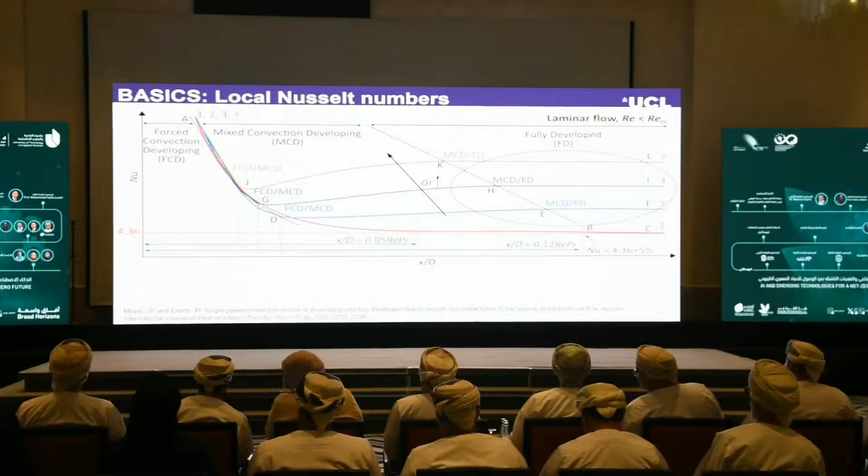However, it still increases in magnitude with increasing Grashof number. Then a small detail in this graph, but it should not be overlooked, is this boundary between the mixed convective developing region and the fully developed region. Because as we look at this graph, we see that it inclines to the left as we increase free convection effects.

This tells us something very important, and that is that the hydrodynamic and thermal entrance lengths, as we see them in our textbooks, cannot only be a function of Reynolds number, Prandtl number, and tube diameter. When dealing with mixed convective flow, which we basically find in all our heat exchanger applications, we also need to account for the Grashof number.

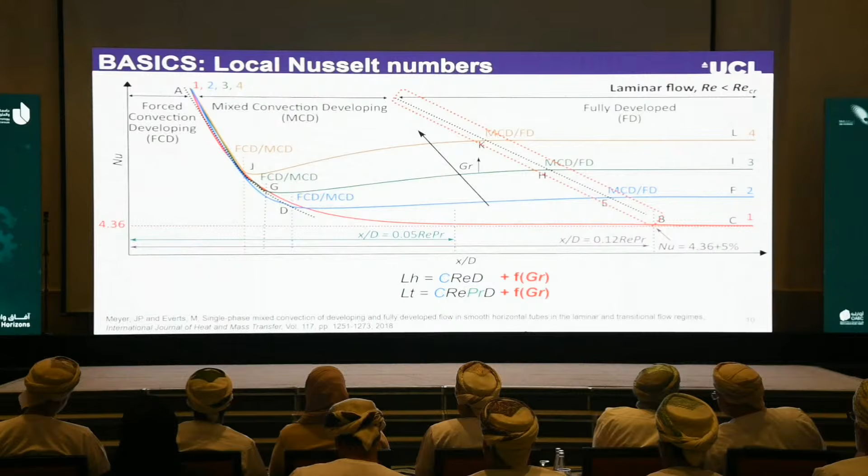It was at this point when I then started bringing in CFD investigations to complement my experimental results, and that's when I really discovered the beauty of mixed convective flow. So I started off basically where I finished, or just paused the experiments for a moment, by having a look at these boundary layer developments in more detail, because now I was able to really look into the tube and see what is happening.

As a starting point, looking at forced convective flow, it was typically as we would expect from our textbooks. The black is the hydrodynamic boundary layer, the red is the thermal boundary layer. As the flow enters a heated tube, these two boundary layers start developing and they merge in the center of the tube. So that's good, confirmed, but now what happens for mixed convective flow?

Then the two cases: the top is for a quite average mixed convective case, and the bottom graph is an order of magnitude higher mixed convective case. As we can see now, all of a sudden, what we've learned in textbooks is not really what we're dealing with in practice, and we need to better understand what's really happening inside our heat exchangers.

So if we start with the hydrodynamic boundary layer, which is the black lines in this case, we see that for both forced convection and mixed convection, it merges in the center of the tube. However, when we increase the mixed convective conditions, this point occurs earlier inside the tube. But then the big difference is that this point does not stay constant. It actually decreases, increases slightly, and then only becomes constant and thus fully developed much, much later along the length.

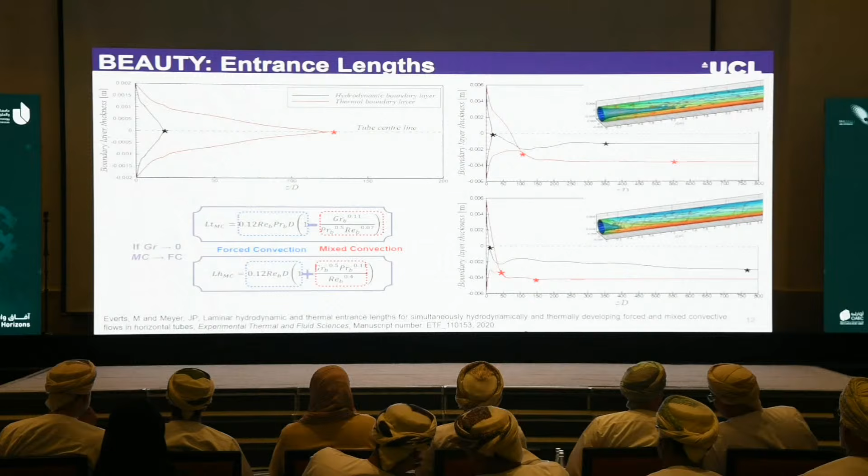The beauty of these correlations is that when the Grashof number tends to 0, they automatically tend to the forced convective correlations. So irrespective of whether you're dealing with forced convective or mixed convective behavior, these correlations can be used.

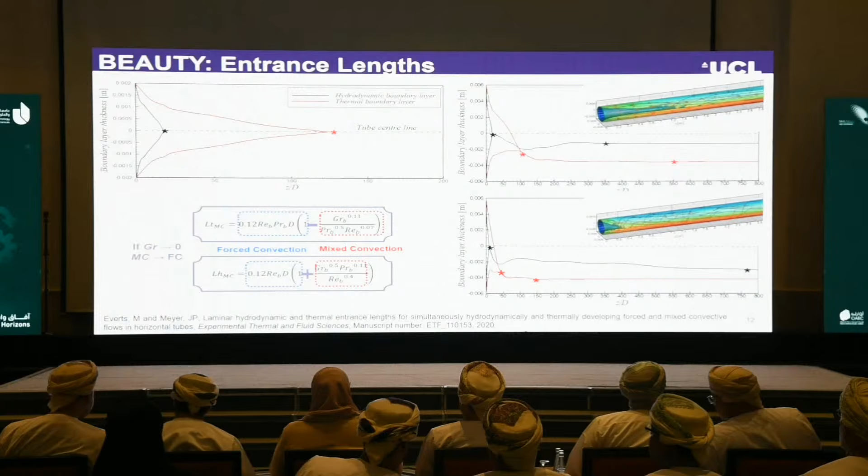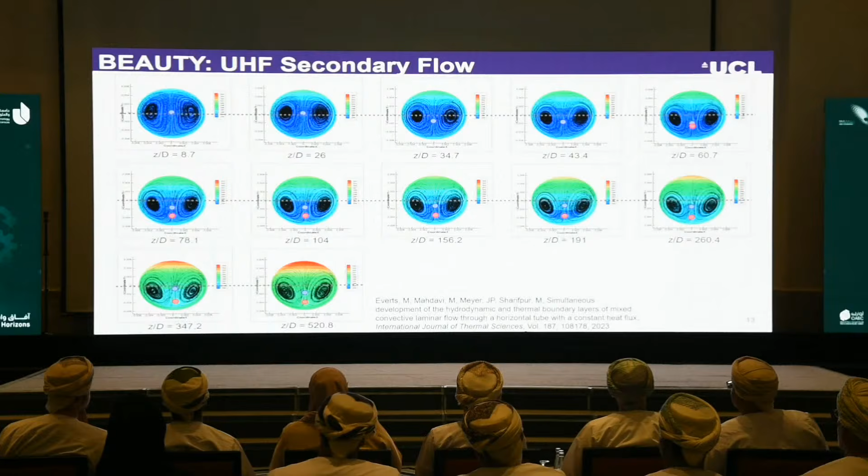I then went a little deeper and looked at the streamlines and thermal behavior inside the tubes. The dotted lines represent the center line of the tube for reference. We can see that the vortices, our secondary fluid motion, as they developed and became stronger, moved downwards and towards the sides of the tube, which explains why those merging points developed below the center line of our heat exchangers.

As we can see here, it starts very nice in the center of the tube, then moves downwards, and then slightly upwards before becoming approximately constant. Likewise, with the thermal boundary layer, this merging point, indicated by the red dots, first moves downwards and then becomes approximately constant.

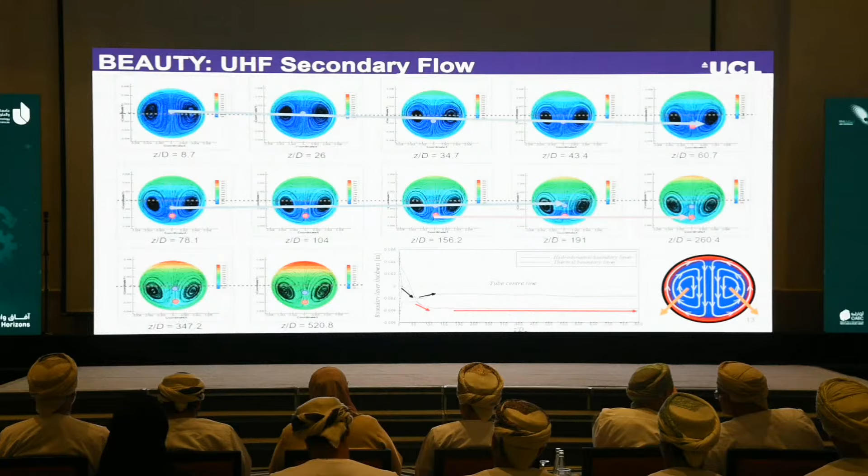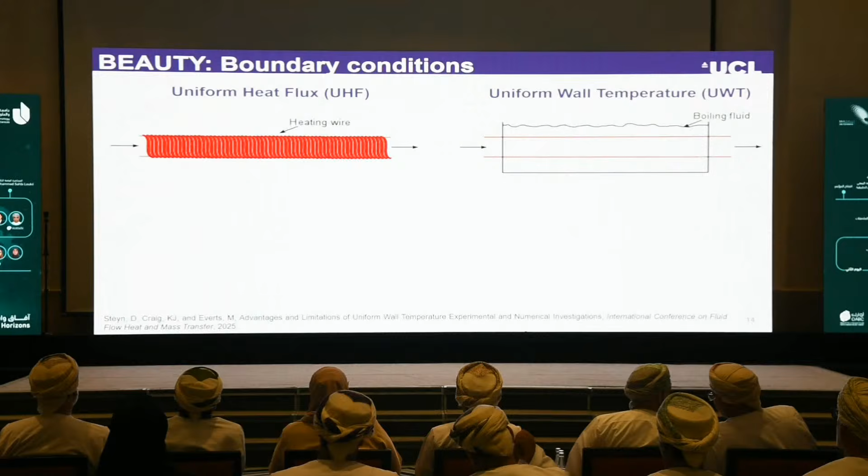The researcher in me was then curious: if this is happening with the constant heat flux boundary condition, what happens if we now change the boundary condition to a uniform wall temperature? Again, these are the two cases we deal with in our heat transfer textbooks.

As the name suggests, when dealing with a uniform heat flux boundary condition, the surface-fluid temperature difference becomes constant once the flow is fully developed. Because this is constant, we can expect constant Grashof numbers and therefore constant mixed convective behavior, as we've seen in the results up to now.

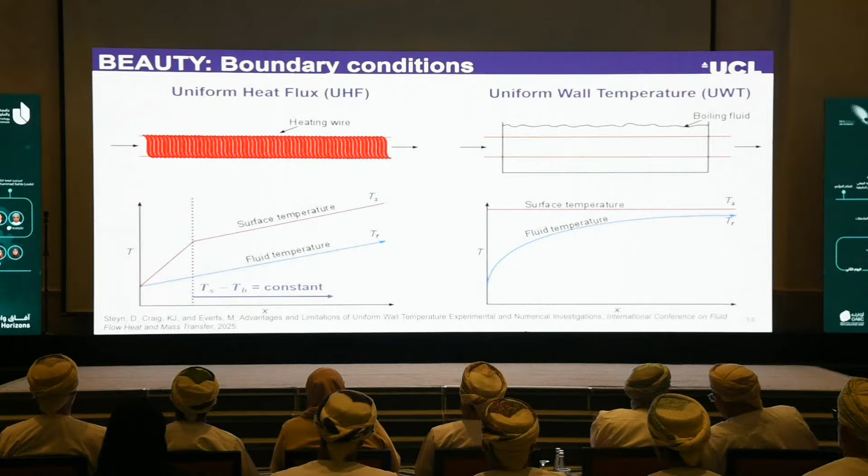However, when we change the boundary condition to a uniform wall temperature boundary condition—which is actually typically the boundary condition we deal with in most phase change heat exchangers, because once it involves boiling and condensation, we're dealing with this kind of temperature profile.

We can see that this surface-fluid temperature difference is almost never constant. And because that is not constant, our Grashof number can't be constant, which tells us that our mixed convective behavior is continuously changing inside the heat exchanger, and we need to know how we can benefit from it to improve our heat exchanger performance.

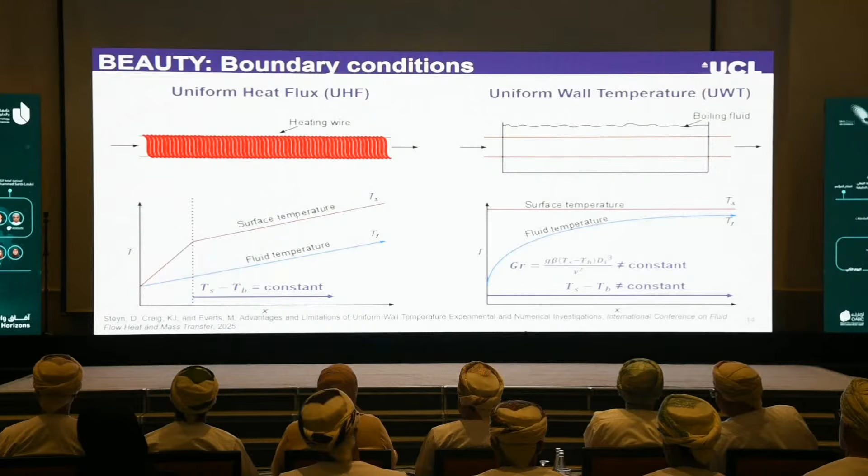Similar to before, I've had a look at the streamlines and temperature profiles inside the tubes, and it looks more or less the same. However, you'll see that now the streamlines are much more symmetrical, which is good, but it also tells us that mixed convective behavior is quite suppressed in this case.

Again, dotted lines are just for reference showing where the center line is. We can see that this merging point, although it developed quite below the center line due to mixed convective effects, as the flow further developed, it moved back very much to the center line.

You might at this point think, okay, but what's the big deal? Because we still have temperature gradients, so we still have this convective behavior going on. But it should be noted that this is the local temperature range—it basically just looks at the local temperature range at this specific cross-section.

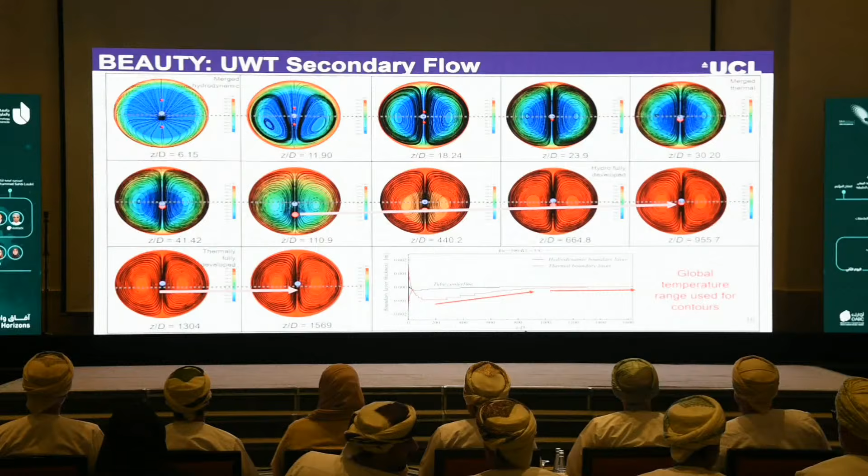If we plot this in terms of global temperature ranges, we see that towards the end of the heat exchanger, there's a very negligible temperature gradient, and therefore we can no longer benefit from any of these mixed convective effects.

It's very important when designing a heat exchanger to understand with which boundary condition you're mainly dealing, because that can tell you whether you should aim for a longer heat exchanger or go for a shorter one. Near the inlet of the tube it behaves quite similarly, but towards the exit the differences become significant: constant for a uniform heat flux boundary condition, whereas for uniform wall temperature we basically lose all of this mixed convective power.

What's happening in terms of the boundary layers directly impacts our heat transfer coefficients, which we're fully dependent on. Irrespective of which boundary condition we're operating with, near the inlet the trends are quite similar: it decreases from a maximum as the flow develops, then increases as mixed convective behavior kicks in and becomes dominant. After a certain point, we can maintain these mixed convective effects with uniform heat flux, but we completely lose this power with uniform wall temperature. The longer our heat exchanger, the smaller the temperature difference becomes.

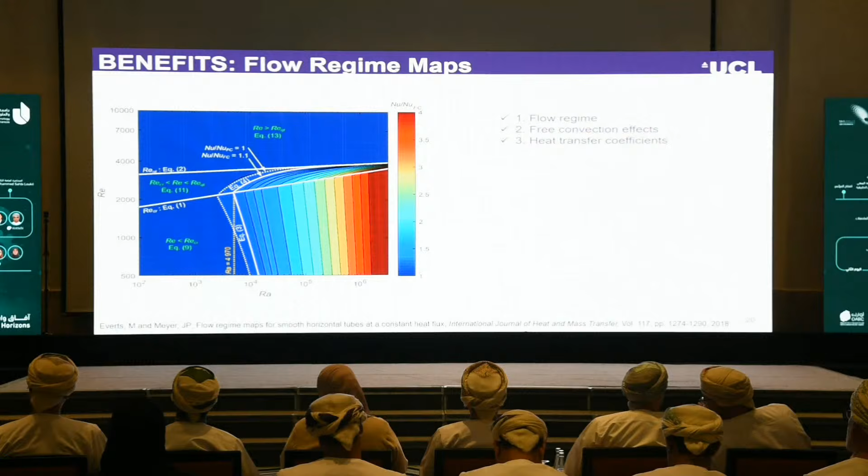How it works is we have Reynolds number, which categorizes our flow regimes, on the y-axis. On the x-axis we have Rayleigh number, the Grashof number multiplied with the Prandtl number, which accounts for different heat transfer fluids as well as mixed convection effects. In the blue areas, that's where we're dealing with forced convective flow, which is general information readily available in textbooks, whereas the colorful regions focus on the mixed convective behavior and the enhancement we can get through this.

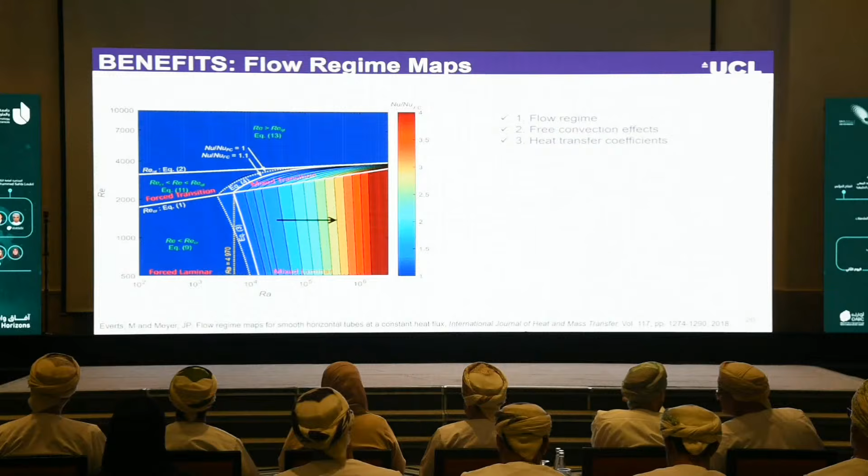So at the bottom we have forced laminar, mixed laminar; in the middle, forced transition, mixed transition; and at the top, the forced turbulent flow regime.

So say, for example, we have a heat exchanger with a Reynolds number of approximately 1,000 and a Rayleigh number of 10 to the 5. We can quickly locate this point on our graph, and we see it's more or less where the color changes to cyan. Looking at the color bar, that's a Nusselt number ratio of approximately 2. Our forced convective reference is 4.36; substituting it in, we have a Nusselt number of approximately 8.7. So without any complicated correlations prone to typing or calculation errors, within a few seconds we knew we had to account for mixed convective flow, knew it was laminar flow, and had an estimation of the heat transfer coefficients inside our heat exchanger.

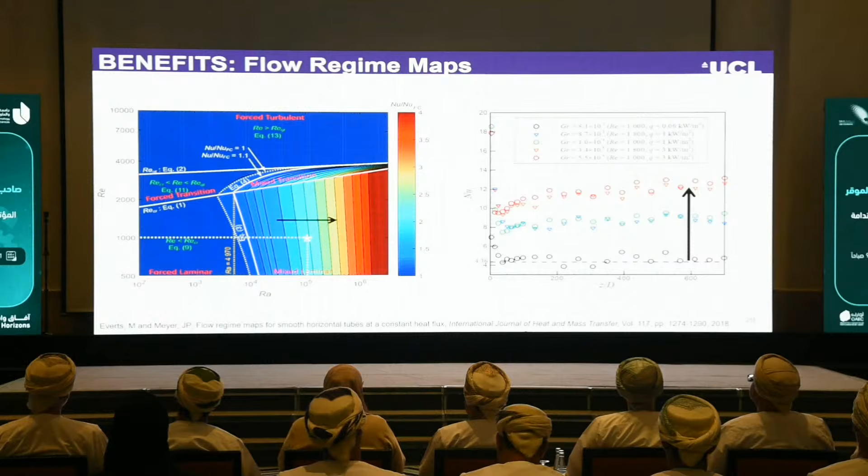I then also developed, for those focused on accuracy, correlations that can be used in each of these flow regimes: for the laminar flow regime, transitional flow regime, turbulent flow regime, and then a summary correlation that summarizes everything for us.

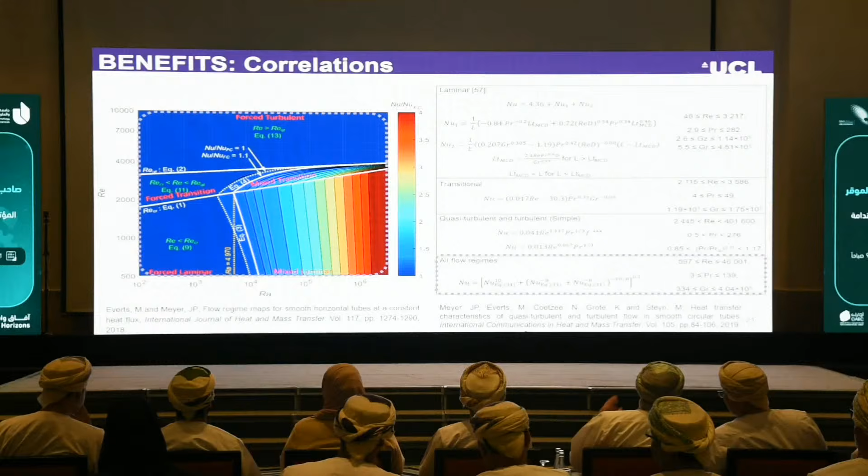Looking at the thermohydraulic behavior is very important because we can't only look narrow-mindedly at heat transfer coefficients, we also need to look at the pumping power. That's what we do within our friction factors through simultaneous heat transfer and pressure drop experiments. As we can see here, with mixed convective flow we were able to give a bigger enhancement in heat transfer than the price we had to pay in terms of pressure drop, which led to higher j/f factors and thus improved thermal hydraulic behavior.

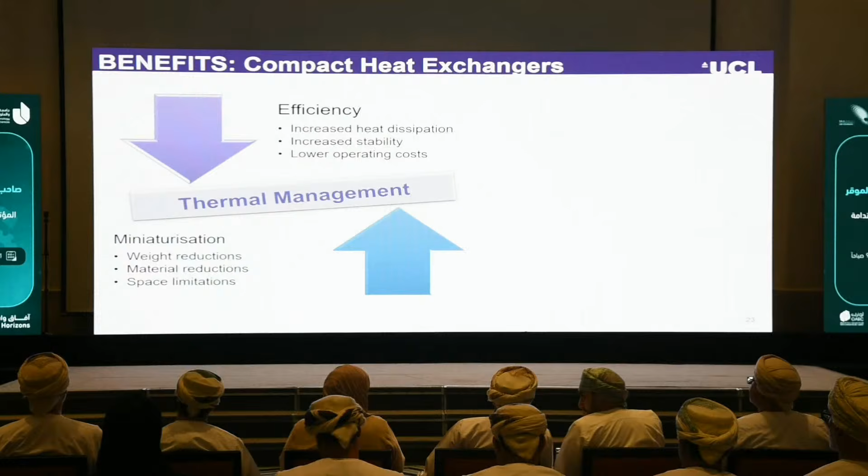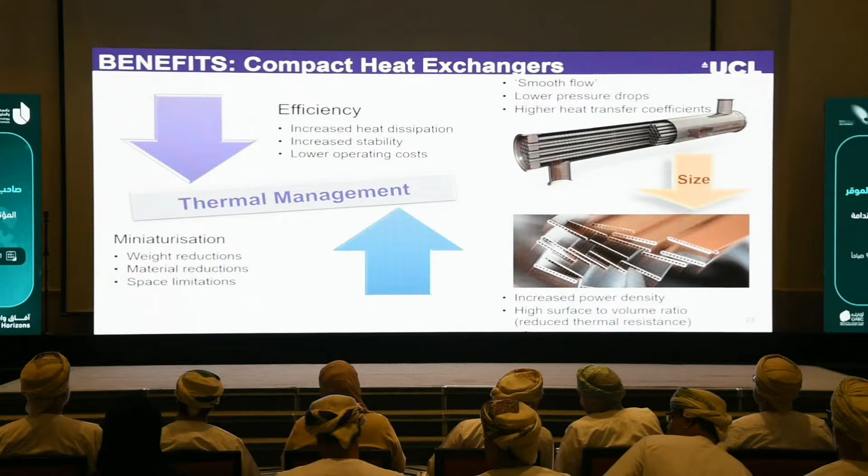When dealing with thermal management, we have this tug of war going on all the time, where on one side we're pulled towards miniaturization, and on the other side we continuously need to increase our performance. For that reason, we often go towards smaller channels to increase the power density and surface to volume ratio. I therefore started looking at non-circular channels to understand if we can compress this mixed convective behavior in a more compact way and still benefit from it.

So to conclude, mixed convective flow, although it's kind of underrated in our textbooks, it's very important in our everyday heat exchanger applications. It enhances our heat transfer, but it also affects our hydrodynamic and thermal entrance lengths, and that's why flow regime maps are really helpful to predict its significance. We can increase this heat transfer by increasing the diameter, heat flux, temperature difference, as well as the aspect ratio, and we can still benefit from this in compact heat exchangers, and enhance it further through surface modifications.

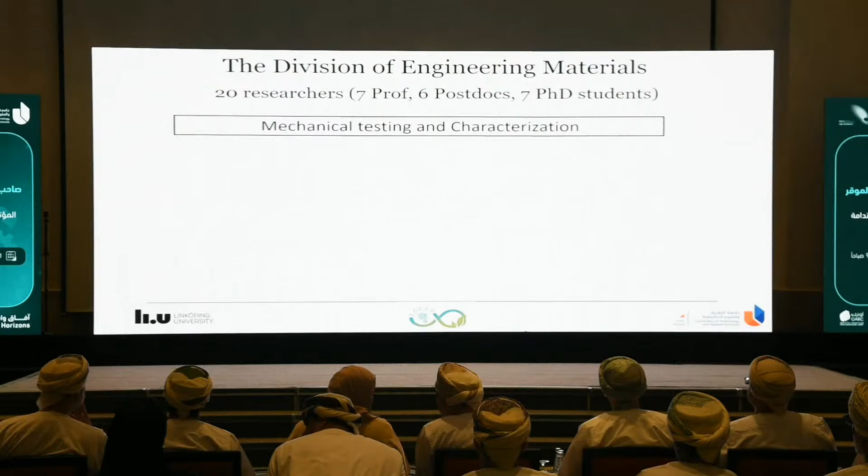We have a lab with many equipments that help a lot to investigate the microstructure and link them to the properties of the material.

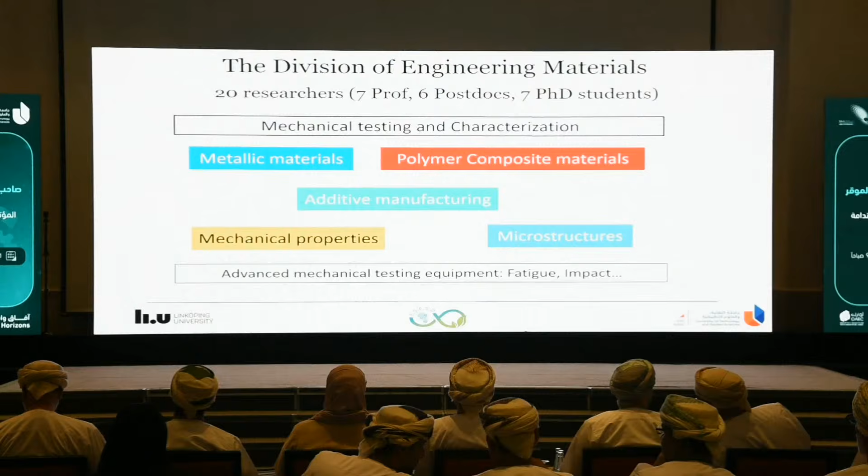Today, I picked 2 topics that I will present to you. The first one is about marine, and how we can make the marine sector, like boats, more sustainable. The second topic will be about aerospace, and there I will focus more on hydrogen as a net zero application.

But before that, since I will talk about sustainable materials, and more specifically composite materials, and how we can use composite materials to make these two sectors more sustainable, I will just give a short and brief introduction to composites. So what is this material?

Usually composite is a combination of two different materials. The first one is fibers, and the second one is a matrix. The fibers usually are very strong, very stiff, so they have very good properties. But to glue the fibers together, we need to add the matrix. The matrix is like a glue that we use to bind all the fibers together and make a component or a product.

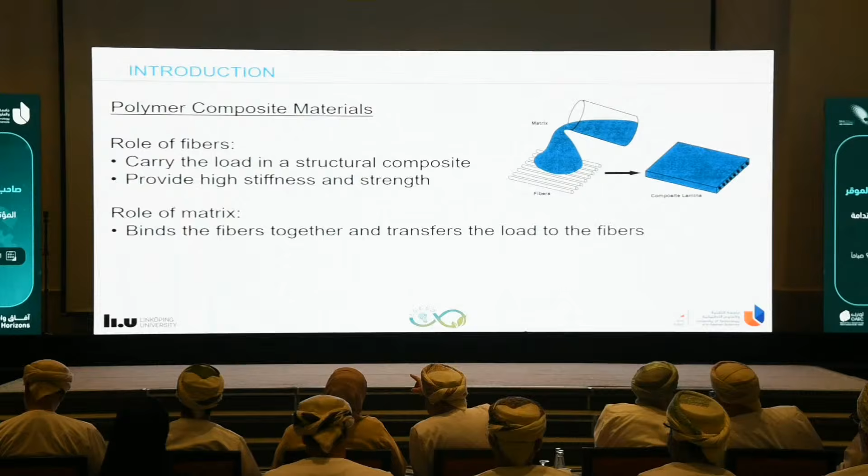Composite material is usually used in different sectors, like aerospace. The Boeing 787 contains 50% composite material in its total structure. It is used a lot in wind energy too, so wind turbine blades are made of composite material, almost 80%, as well as sport cars and many other applications.

But the question is why we use composite material. Composite material is very light, but it has very strong properties. We talk a lot about sustainability, and we want to use more sustainable materials. For example, if you have a heavy structure moving, like a car or an airplane, one option to make it more sustainable is to make it lighter. If we make an airplane lighter, it means it will consume less fuel, and the CO2 emission will be less.

So composite material is the best material to use to make a structure very light, whether it's a car or an airplane. Every structure which is moving, to consume less fuel, we can replace heavy materials like steel with composite materials. These materials are also corrosion resistant, so we don't have any problem with corrosion. We can also tailor the properties of these materials, putting more fibers in the direction where we have a load to get the structure stronger in very specific directions.

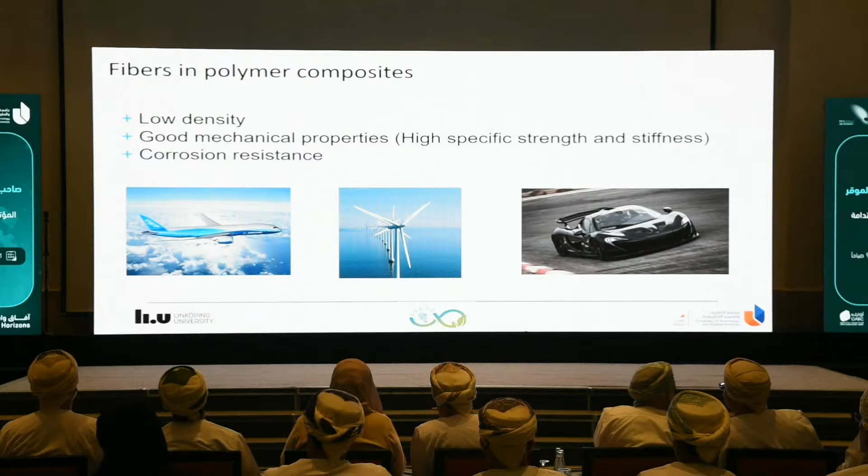This boat is made from two types of fibers. We call the black one carbon fiber, and the white one glass fiber. The problem with those fibers is they are not sustainable. To make them, they go through a lot of chemical reactions in the lab, high temperature, high pressure, and so on. So we wanted to use a more sustainable material.

One option is to use what we call natural fibers, just taken from the forest, from the trees. The question is, can we use these fibers and make the boat more sustainable? This is what the company wants. They want to show that their boat is 100% electric, but also made from sustainable material.

Those fibers have problems. They absorb water. So if you make a boat directly from those fibers, they will just degrade and absorb water. We wanted to help this company use more sustainable materials in a smart way and reduce their sensitivity to water and humidity. One option is to coat these fibers with graphene, make some treatment and check how the sensitivity to water and humidity will change.

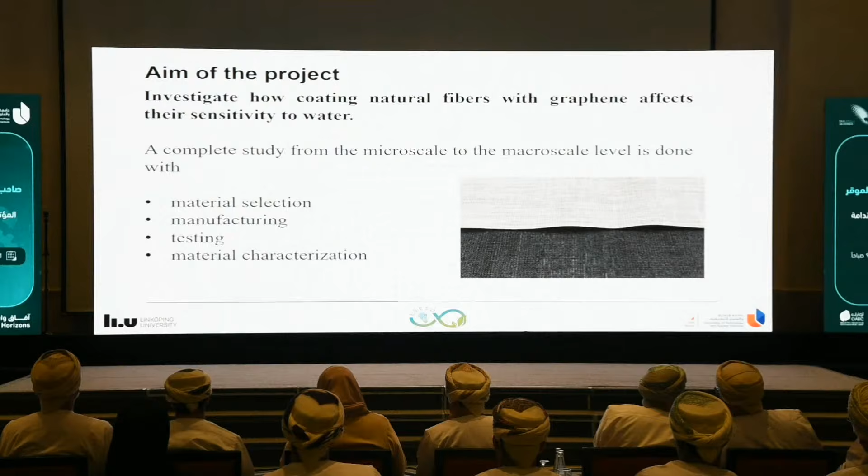What you see on top in the picture is the fabric or fibers that we use. We use a fiber called flax fiber. What you see on the bottom is the fibers after coating them with graphene. For the coating, we had a partner in the project, a company in Sweden.

They are experts in coating fibers for thermal conductivity, but it was their first project working with natural fibers - they used to work with glass fiber for thermal conductivity. What they do is prepare a solution with graphene, like an ink, put the fibers in it, then dry it, and it becomes coated. They did a great job, the coating was perfect.

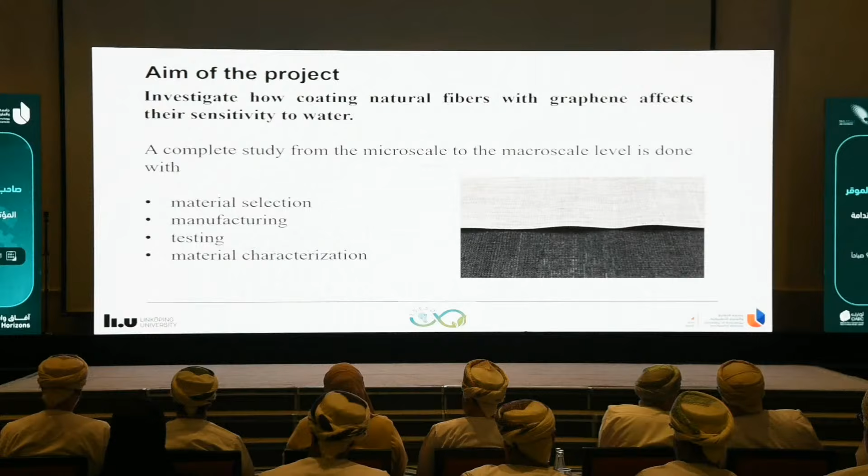We had three suggestions in the project. First, we made a part with flax fiber, natural fibers, and coated. The second option, we only coated the top and bottom layers, because we thought this could protect the inner layers from water and humidity, so water would not go inside the boat. In the third option, we coated the whole structure.

So all the material we used was coated. We used a flax fiber, and a bioresin as the glue. We used a method called vacuum infusion, which I'll show you later how it works. We did all needed investigations at microscale level, at the lab, and also for the demonstrator.

We applied many mechanical tests needed to approve that this material can be used for the marine industry. We also did water absorption testing - we put the structure we built in water to check how much water it would absorb if we coat the fibers.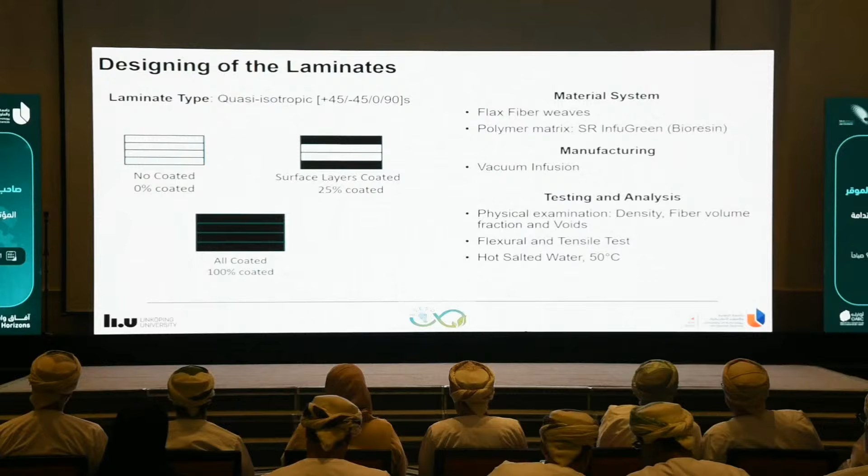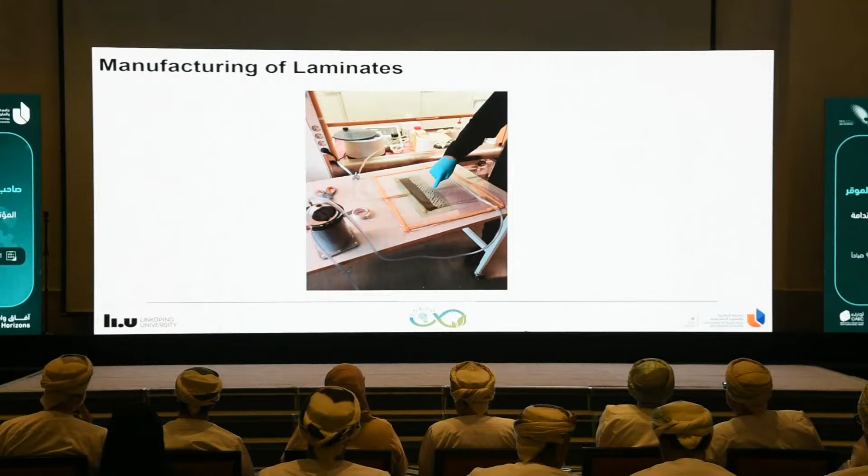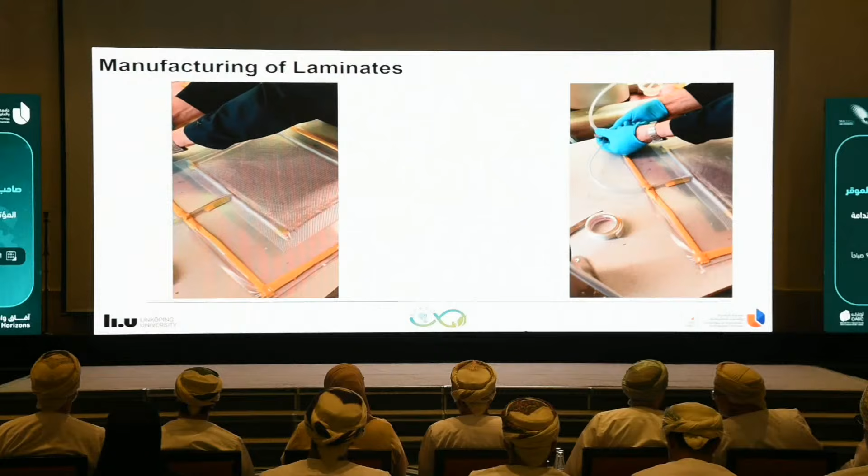This is the vacuum infusion method we used, how it works. We have the resin going inside the layers that we put. Let me show you this video - first you have the layers, the flax fibers, the natural layers, and the resin going inside, with a horizontal tube that has some holes.

So the resin propagates inside the whole fabric. This is a simple flat geometry that we made, but we also manufactured a component using this method. The resin covered the whole area along the length and the thickness.

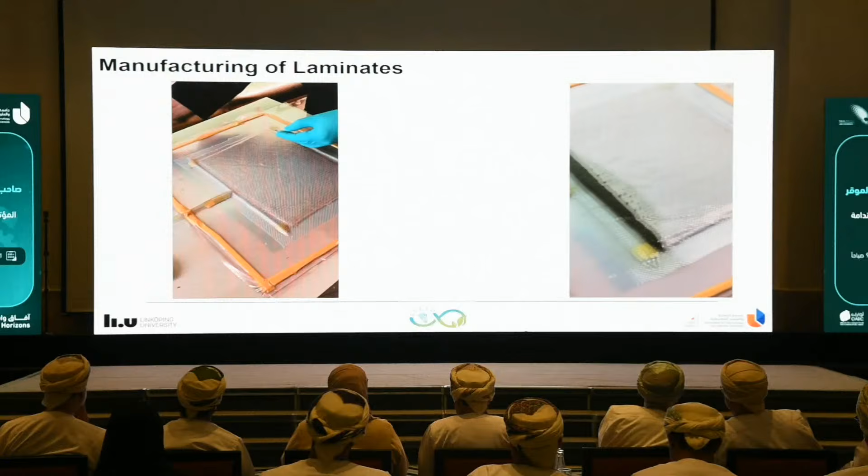So then we had the question, why didn't it work? After discussing with all the partners in the project, we noticed that the company who did the coating applied the same process they use to coat fibers for thermal conductivity. This was their first project with natural fibers to improve mechanical properties and resistivity to water.

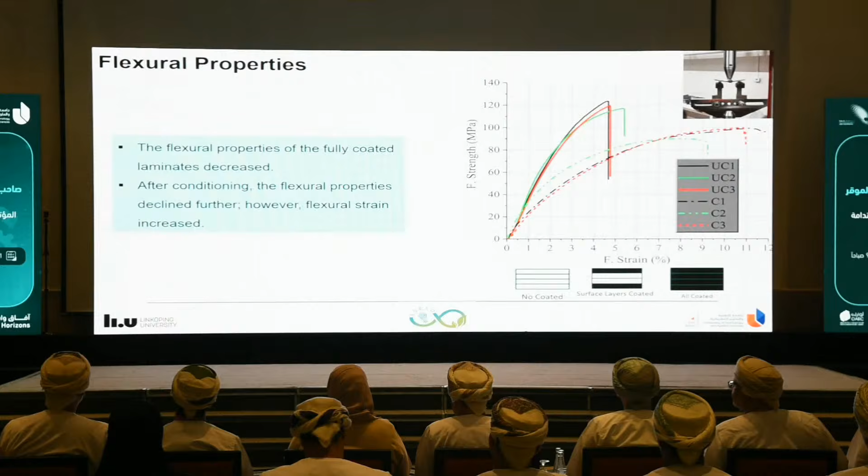That was actually helpful because that was the problem. When they did the coating the first time, they already had a certain concentration they use for thermal conductivity, not for natural fibers. So the results were different.

We coated the material with higher than 1.5%, but it didn't show good results. So there is an optimum value, and if you increase the concentration a little more than that optimum, the properties go down again. For that reason, we decided to keep 1.5%.

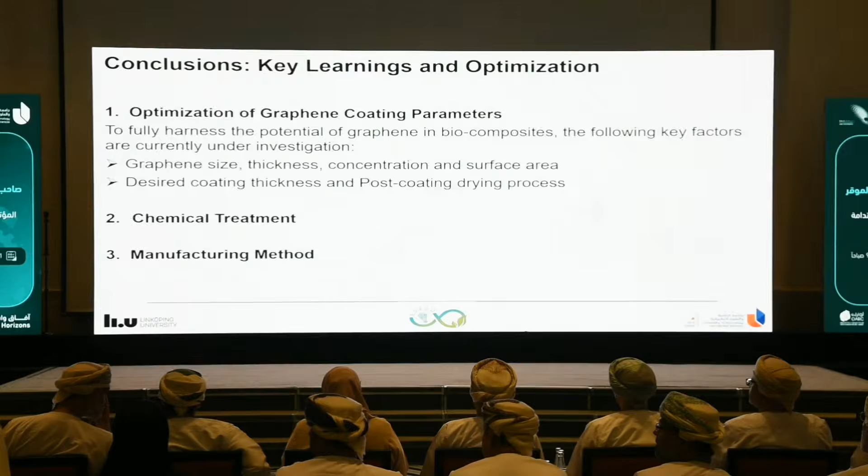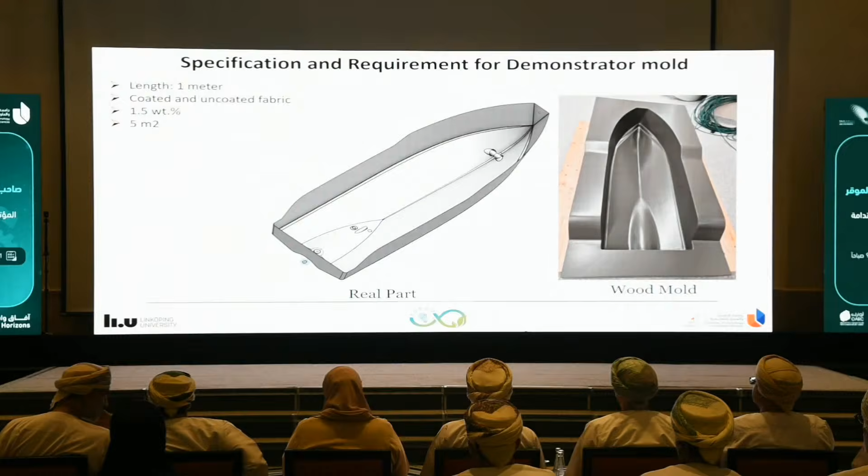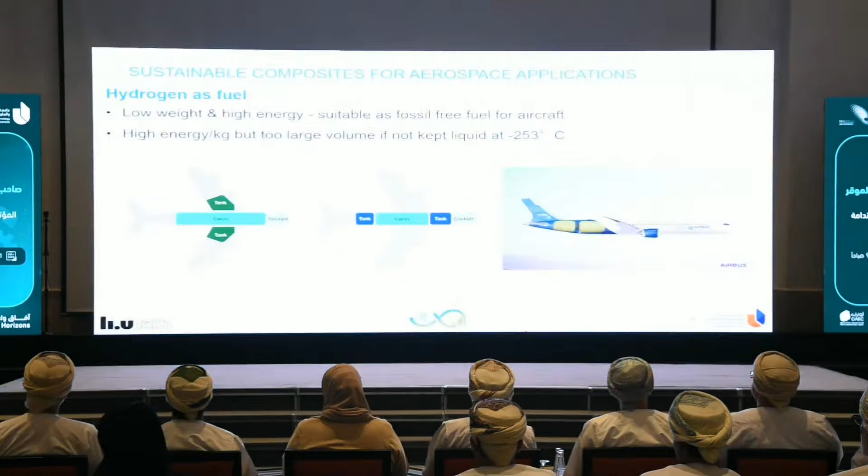Now I will move to the second topic I am going to talk about, which is using those fibers for aerospace net zero applications. We talk a lot about hydrogen, using hydrogen in airplanes.

And the question that most organizations or companies in this area talk about is where to place the hydrogen tank. Should we place it in the middle, or should we place it in the wings? This is actually a topic where many organizations and researchers are developing. But the question we are actually investigating is from which material we should make this tank.

You can use steel, but steel is very heavy, so polymer composite could be a good candidate to make those tanks. When you store hydrogen, it has to be stored in a liquid state, so it's compressed, meaning the pressure is very high, but also the temperature is very low, minus 253 degrees. So we need to prove that we can use composite to carry this temperature without breaking.

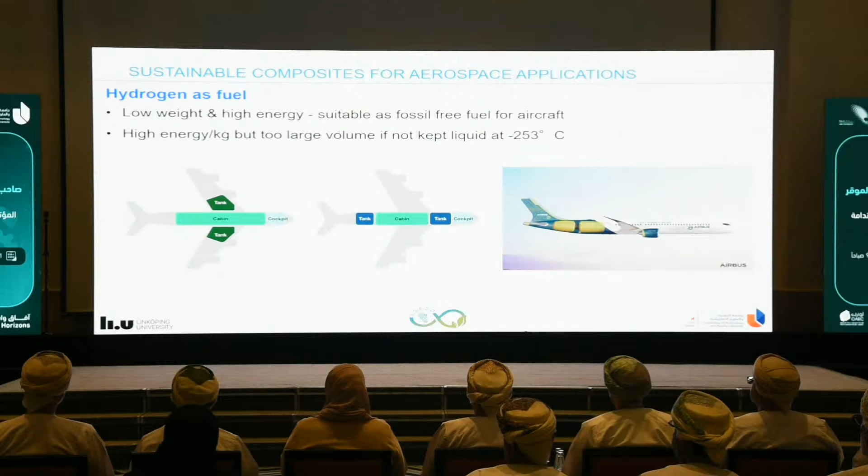So what I'm going to present is some investigations we have done to make a tank from polymer composite materials. Composite, or carbon fiber in this case, is a very good candidate, but we have to prove that there is no leakage, because if you have cracks in the composite, then you will have a leakage of the hydrogen, and that means there is a problem.

In this project, there is a company in Sweden called TeXtreme. They said, we will develop a material that can be used for this tank. Our task in this project was to prove that there are no cracks, so there will be no leakage if we store hydrogen.

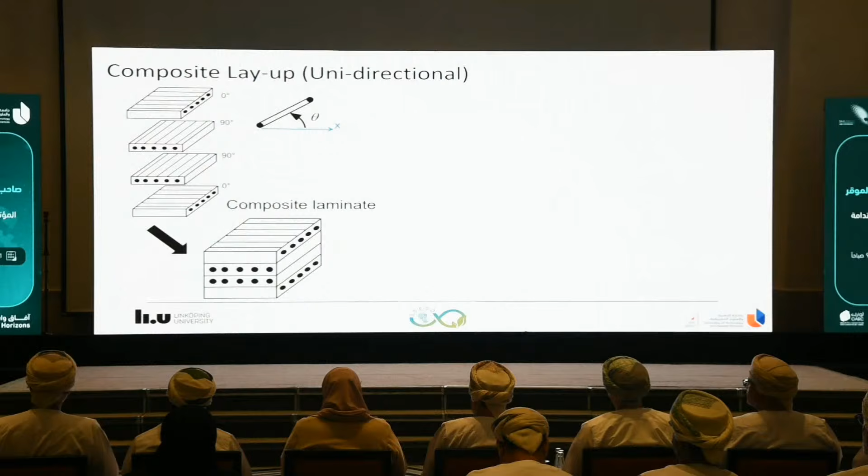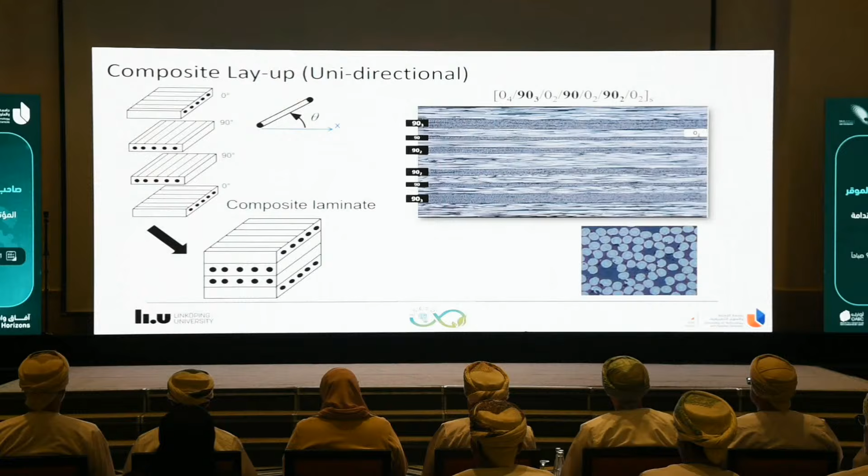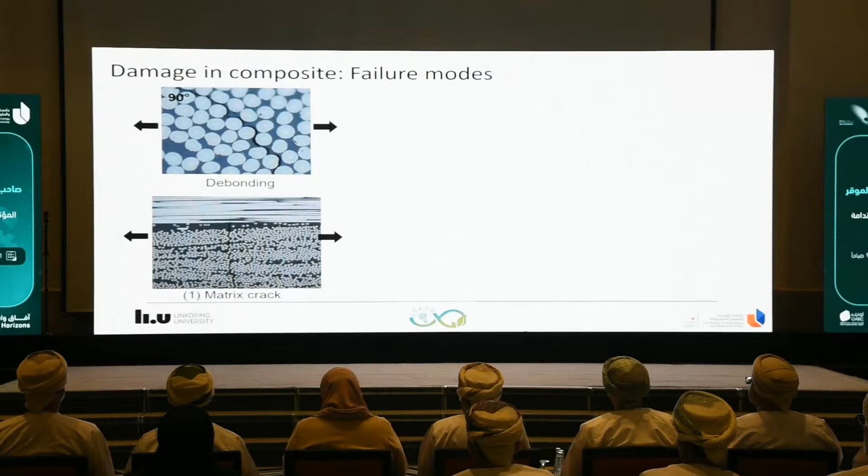After loading this tank with hydrogen, you apply pressure and temperature, and there is a risk you see microcracks. It can be small microcracks between the fibers and the matrix, it can be what I call matrix crack, it can be a crack between two layers, which we call delamination, or it can be fiber breaks. In our studies we try to investigate all these types of damage using this material.

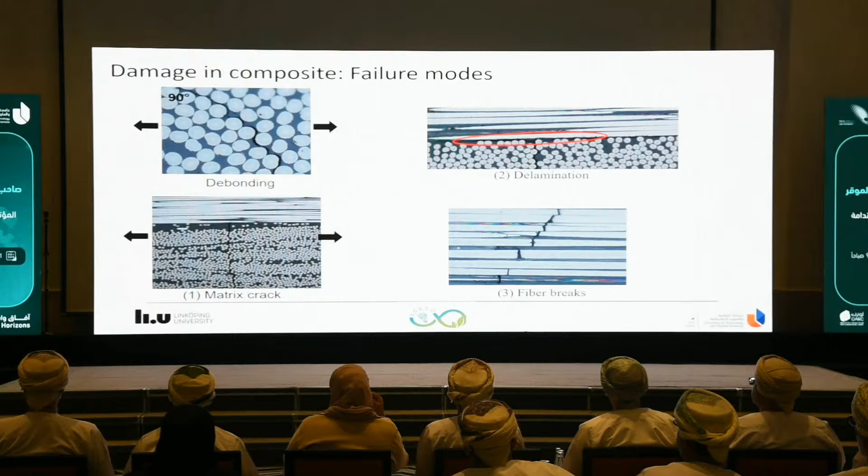With that, we applied a lot of mechanical testing and thermal tests as well. This project was done in collaboration between our university, TeXtreme, the company developing this carbon fiber material, and RISE, which is a research institute in Sweden.

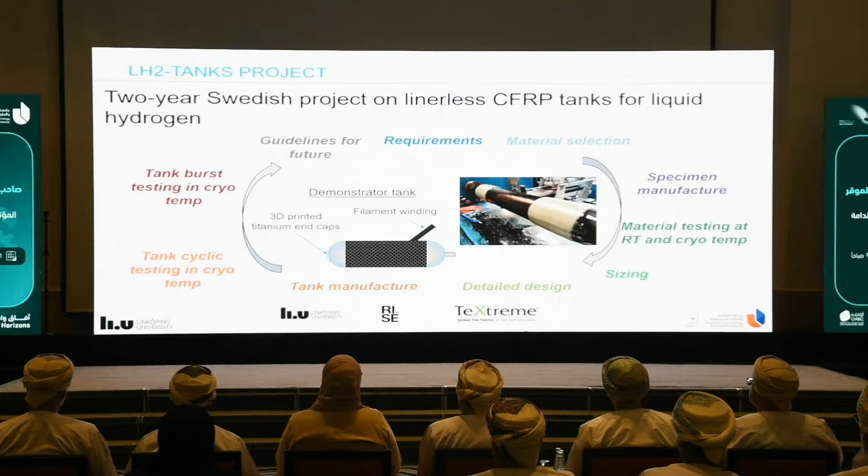We did studies from specimen level, like coupon level work in the lab, up to the tank at the end. We made the tank, and the end caps were printed from titanium, so they were not made of composite. Only the pipe in the middle was made of carbon fiber, using a technique we call filament winding, where we wind the fibers to make the tank.

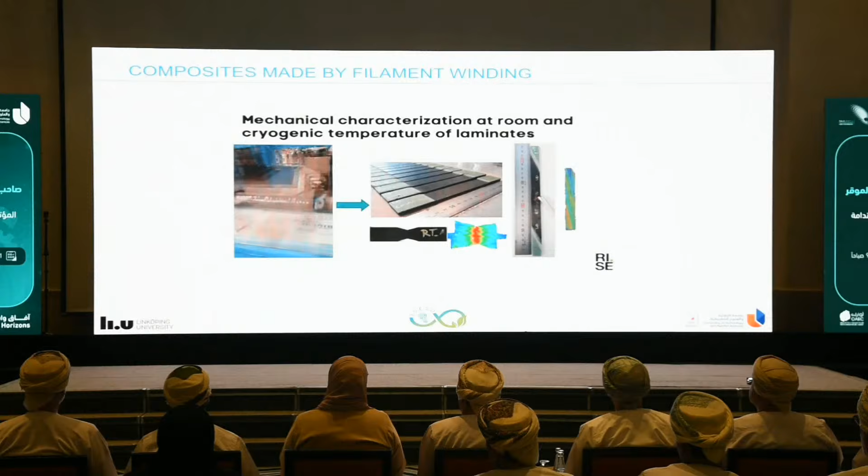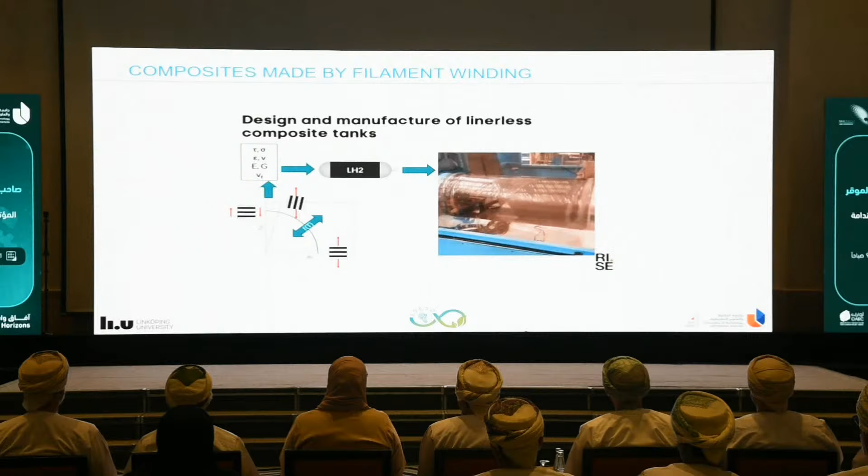So this is how we wind the fibers to be able to make samples to test in the lab, and this is how we wind the fibers to make the tank at the end. This method is called filament winding. This was done along this project.

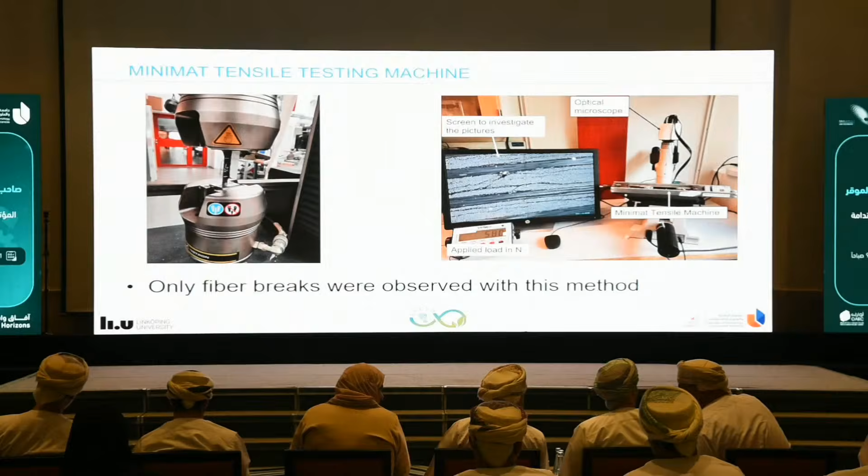We were checking samples for small microcracks, but we also did thermal fatigue or thermal shock testing. As I said, we want to store hydrogen, and the temperature should be around minus 250 degrees, so we need to prove that this material can really withstand this temperature. For that reason, we applied thermal shock.

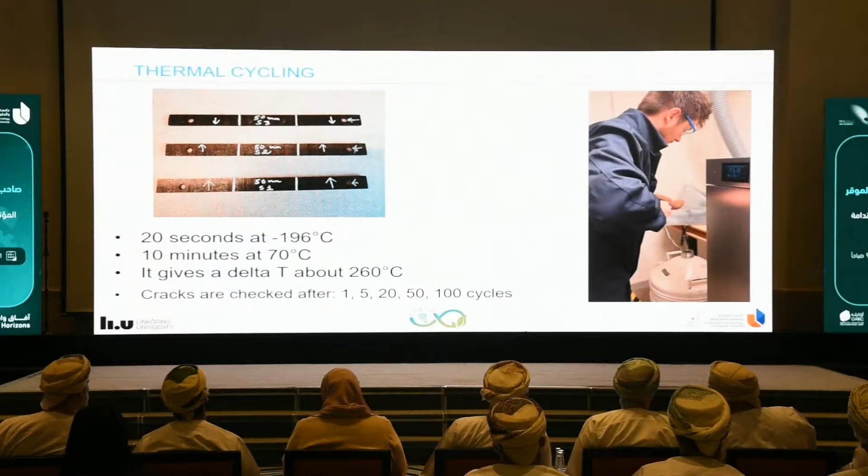We put specimens in liquid nitrogen for a few seconds, at minus 196 degrees, and then took the specimens and shocked them at plus 70 for 10 minutes. We repeated this test 100 times. This really simulates the effect of filling the tank with hydrogen, and then when the tank is empty, the temperature increases inside the material, and you need to fill it again. This simulates how many cycles, or how many times, you can fill the tank.

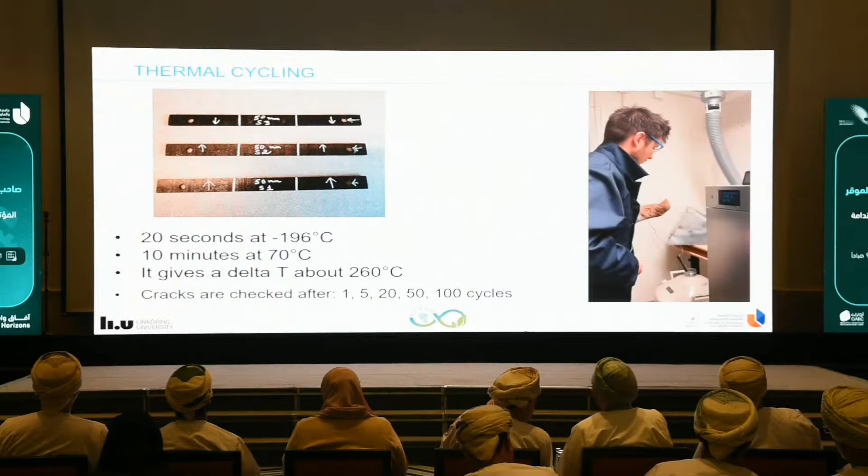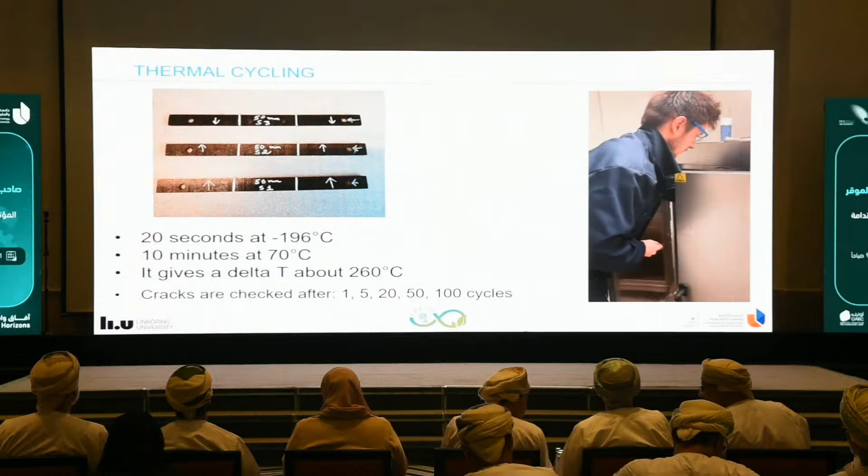After that, we also did some microscopic analysis, checking for any damage and whether the material can still work. What we found was only some cracks in some layers, which means the hydrogen will not be able to propagate from the inner part to the surface of the tank. The hydrogen will be stored there, since the cracks we saw were only in a few layers, so the hydrogen won't find a whole path to the outside. There will be no leakage if we use this material.

And we tested the tank. We did this outside the lab, almost in the forest, in a very safe place, and we controlled the pressure. We applied liquid nitrogen and measured the pressure. We succeeded in using this material at about 50% higher than the pressure the company wanted. With that, we proved that this material can be used to make those tanks.

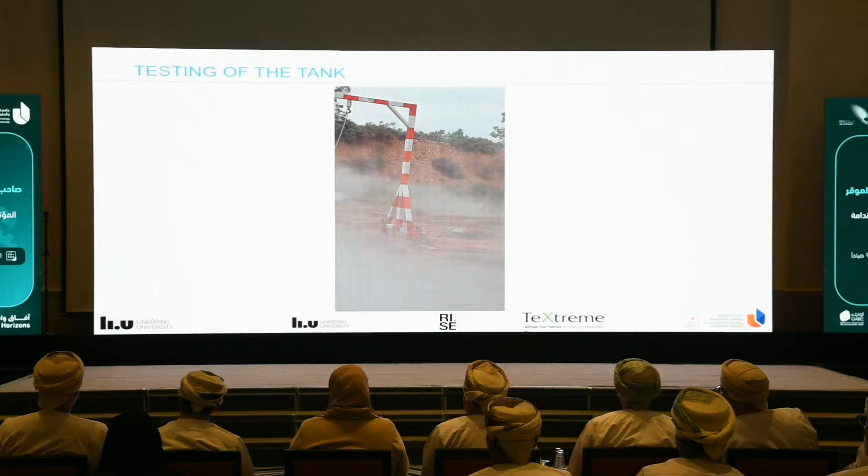So with that, I would like to thank the organizer committee for inviting me to give this talk. Thanks a lot, it is a great opportunity for me to be here today. And finally, I would like to thank all of you for your attention. Thank you very much.